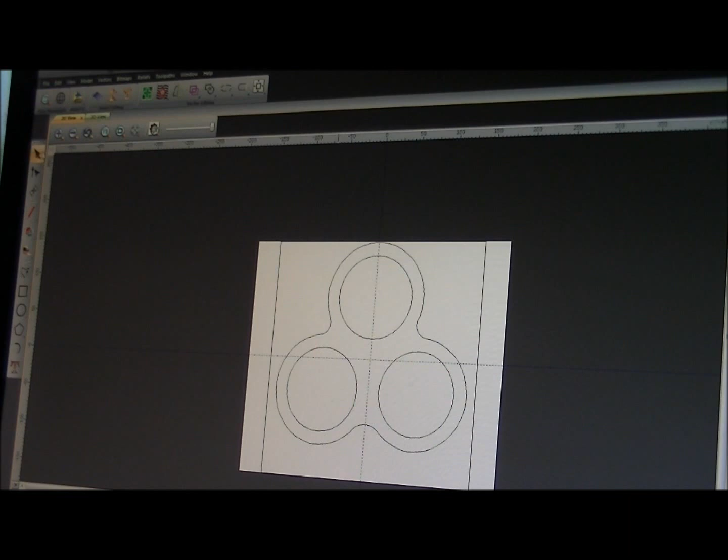Okay, so having snipped away at all the lines that we don't require, we end up with our basic shape. Now there's just one last little circle we need to put into the middle here, which is going to be our center boss, and I want that to be 19mm. Okay, so here we have our basic design. We've got to do a few special things with this now.

Select just a group like that. So what you can do is select as much as you can, and then if you press down the shift button on the keyboard and then select, you can add on selected parts. So what we're going to do now, we're going to use the arrows on the keyboard to move this design around. So what we want to do is reposition it in the middle of the material.

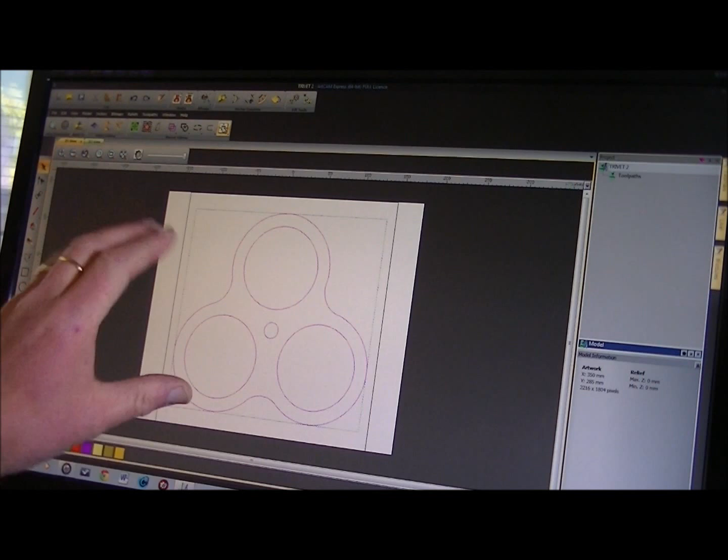There is another way we can do it, so we'll put it back. So that's just using the up and down arrows and side to side arrows. So you can move things around fairly easily. But if you go up to here and hit this button here, it will position the model or our design in the middle or dead center of the available material, which is what we want to do.

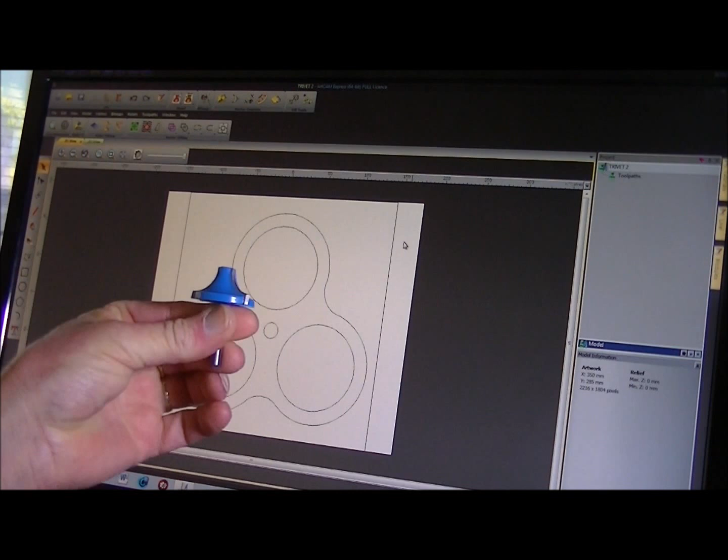So now what we need to do, we need to start the machining process, or the machining strategy. Now this is one of the tools that I converted. It's the round over tool that I converted on the lathe. What we need to do now is make an offset.

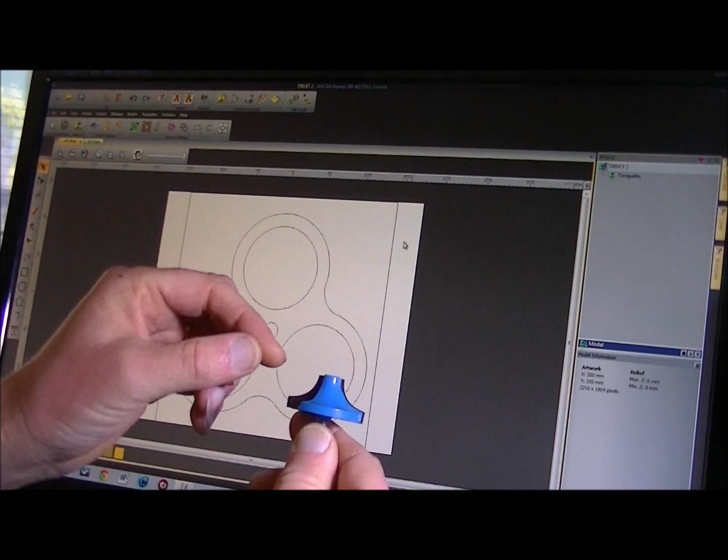In other words, if we use this tool on this piece of work in ArtCAM at the moment, it would tend to want to follow this line around, which we really want it to do, but it will follow it around with the center of the tool, which would not be very good. It'd be disastrous because it would cut into the material that far and we'd have a square edge. What we want is we want this cutting surface here to do a round over motion around this edge.

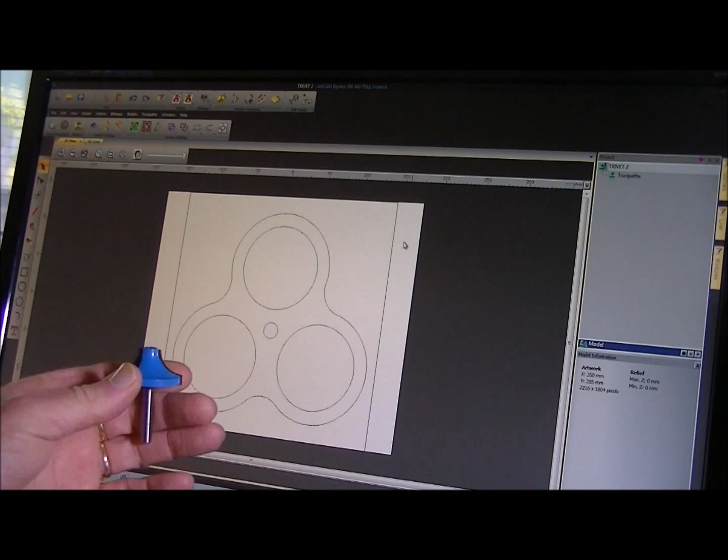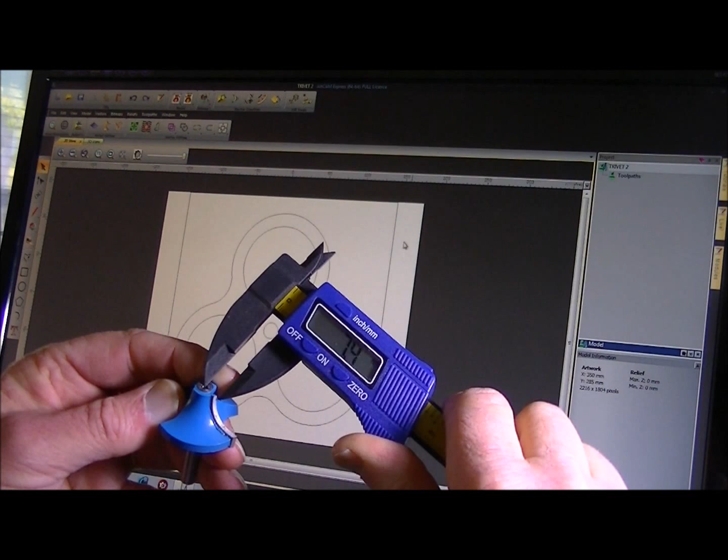So to do that, what we need to do is put into here what is known as an offset, or a tool offset, you could call it. So what we're doing here, we're going to measure from the center of this tool. I'll bring it a bit closer. Center of this tool to the cutting edge. You know, within sort of 0.5 millimeter is fine. I'm going to call that 6.5.

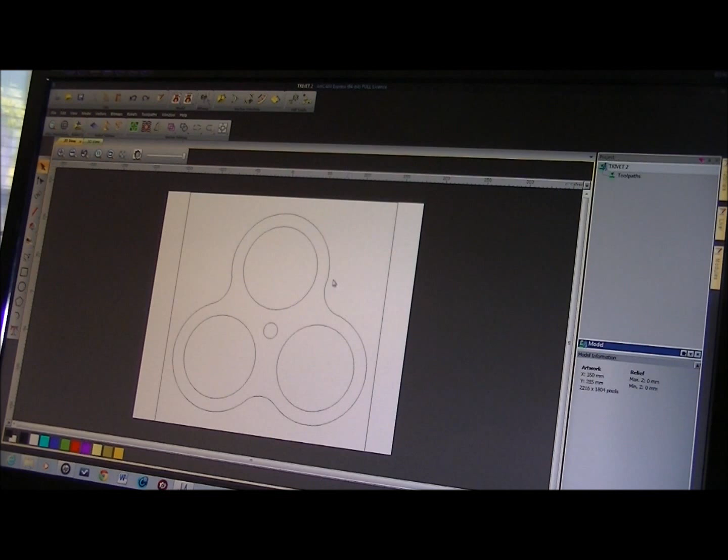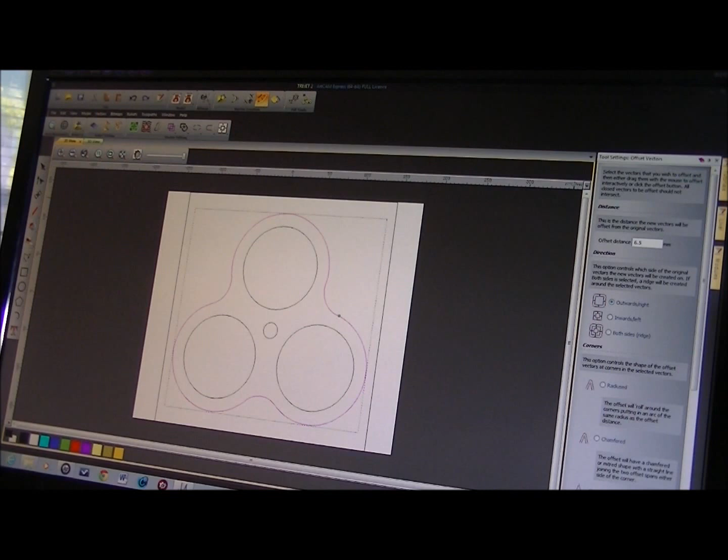So what we're going to do is we're going to select the outer vector, and we're going to duplicate a vector by the use of this tool selection here and this dialog box, and we're going to duplicate that vector, which is a line, 6.5 millimeters outwards. We want it nice and sharp, and we're going to offset, and we can close that dialog box.

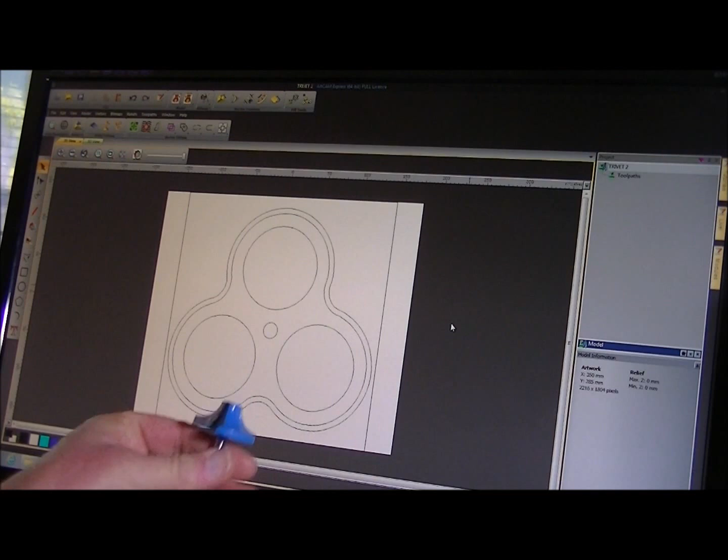So that is the line there that the center of the tool is going to follow. So that means then we'll be cutting with the full cutting surface, and we're not going to dig into the material with this square edge at the bottom.

The next thing here I'm going to show you now is how to make a pattern around the outside, or jimping, because I just don't want plain wood, although it's going to be nicely rounded over. I want to put a little bit of a pattern in it to just break it up a bit. So to do that, what I'm going to do is I'm going to come over here to the tool selection.

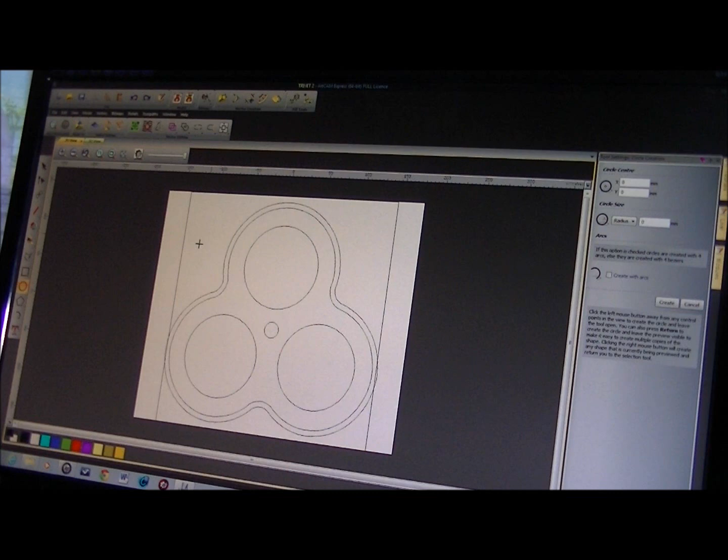In this case I want to draw a circle and click on there. And then come over here to this dialog box and say, okay, we'll have a 3mm radius circle there, so that would be 6mm in diameter, and create. And we can get out of that.

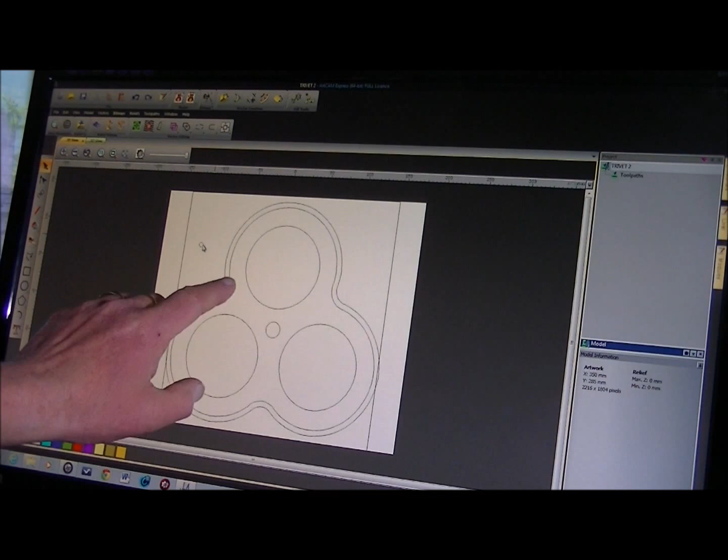Now what I'm going to do now is use a new tool, and that is I'm going to place a row of these drillings or circles around this line, and the tool to do that is up here. But first we need to select, and then select the line which you want to copy these circles around.

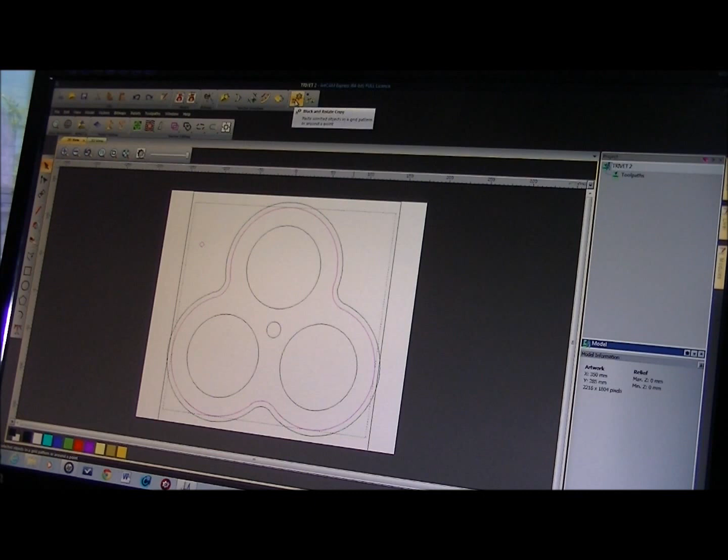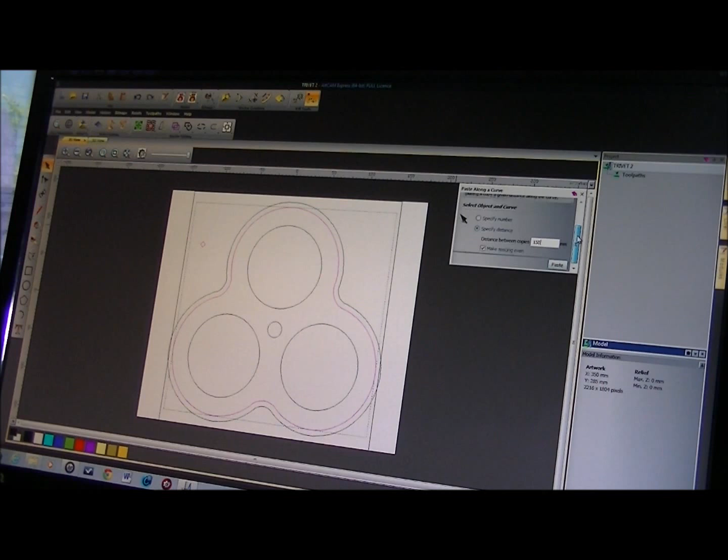And in this section here we have block copy rotate, or block copy. In other words, it'll copy it in a block, or it'll copy it in so many circles in a ring. But we want to copy along a line. That'll bring this dialog box up here, and we can specify a specific number of circles that we want to place around there, or specify a distance between them.

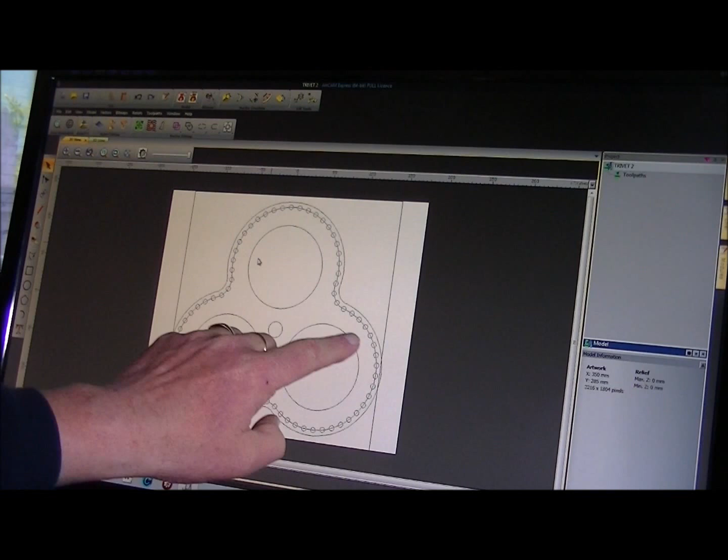So I'd say 12mm, with a 6mm hole, and paste. And there you have it. All you need to do is to select this row of circles. Now just pick one and just select it, and it selects the whole lot.

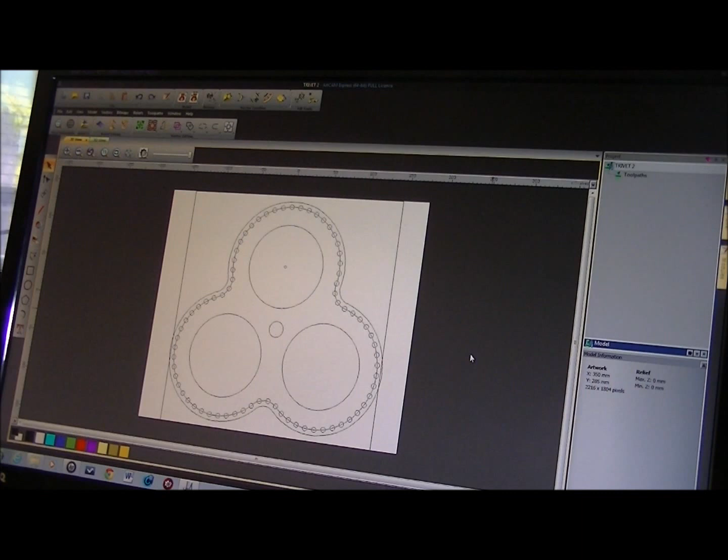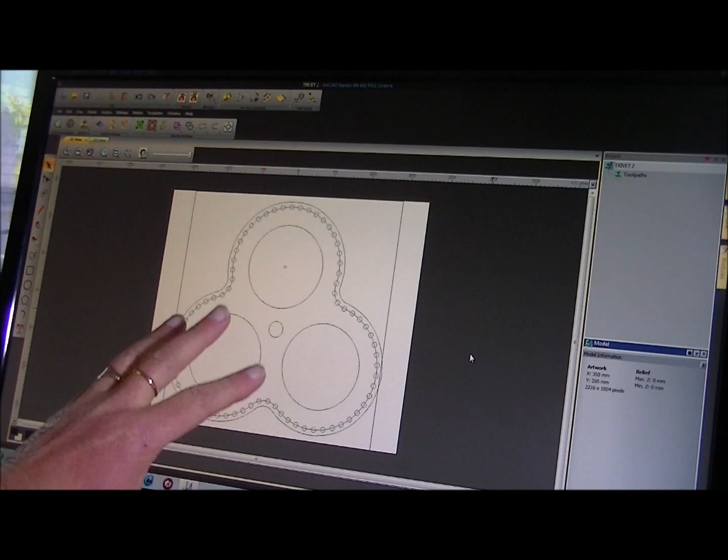And get rid of that. So what I want to do is I want to be able to put a screw in here, and a screw in here to hold the material down, so I can machine around the outside, because this material is not going to be there. Initially I am going to be clamping the whole material from out here, but to be able to machine this around here, I'm going to have to clamp it from the inside. So I'm going to do it in 3 places: center there, center here, and one in the center here with a washer on it. So we have to be selective of what we machine first.

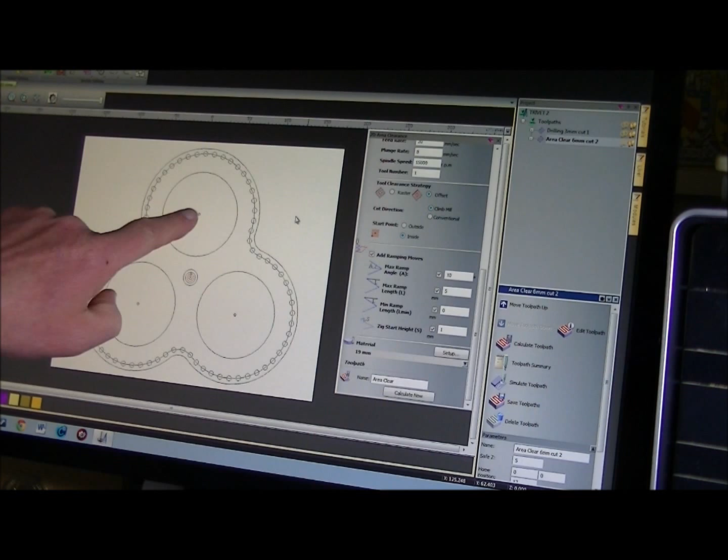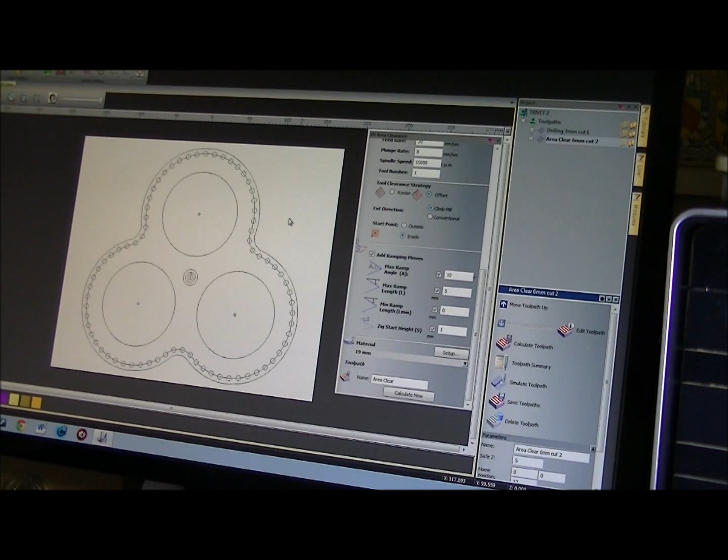So up until this point we will be having a clamp on this side and a clamp on that side, holding the material down onto the bed for us to drill these holes and machine this center part out. And at this stage then we are going to be putting a screw in here, here, here and here. So now the next operation is actually to cut this out, and we're going to cut it out on the line that we've put this row of holes in. And we're going to cut it out with the 6mm, and we're going to run the mill on the outside of the line.

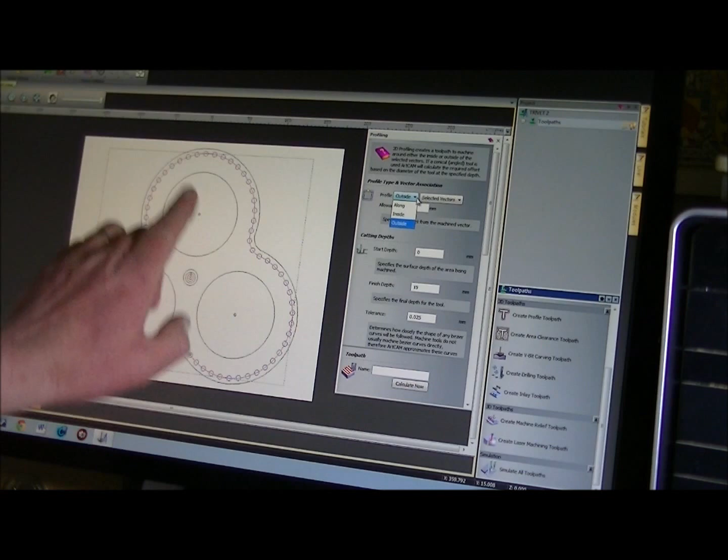So let's get out of this a minute, and what we'll do, we'll select that line, and select create a profile toolpath. And now we have the selection of machining the outside, which is the one we actually want, along this line, which means the center of the tool is going to machine along the center of the line, whatever depth we decide, or it will do the inside, which will be on the inside of the line. Follow it around. So as it is, that's correct. Now then,

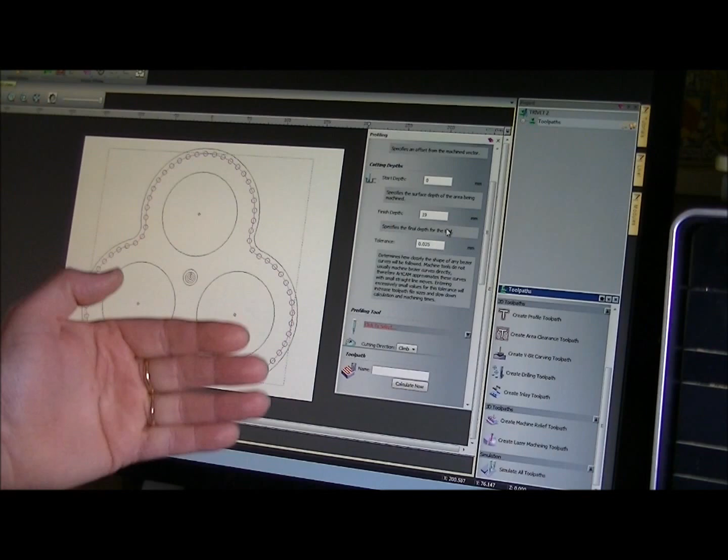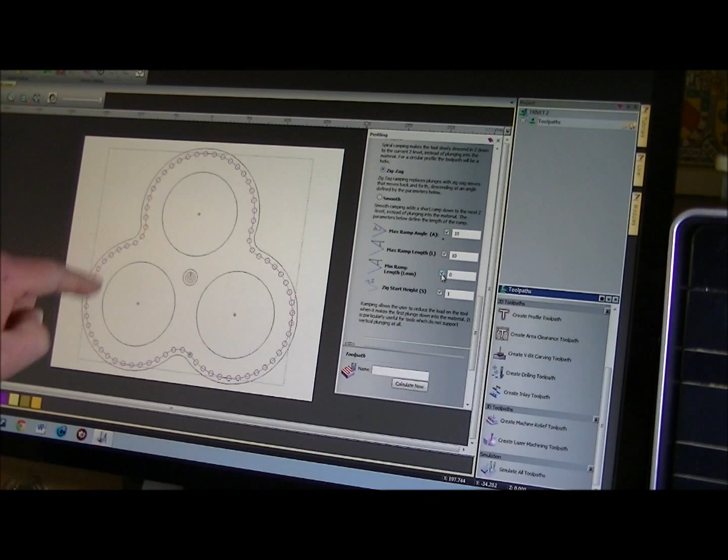I mean, it's only oak, but you know, I don't like to put the tool under any great stress, and it makes it easier to evacuate the material coming out of it. 50 there, I suppose. 45, 50. 50 might be a bit high, so I'll go 40. 40 millimeters per second, which is a pretty decent rate for a little tool. Plunge rate. We will go 15 millimeters plunge. I'll let it come through the top zigzag. In this case, we can take this back up to 10. It'll just follow the curve around like this and work its way in. That's all okay. I don't need to leave any bridges or tabs. Calculate. Done.

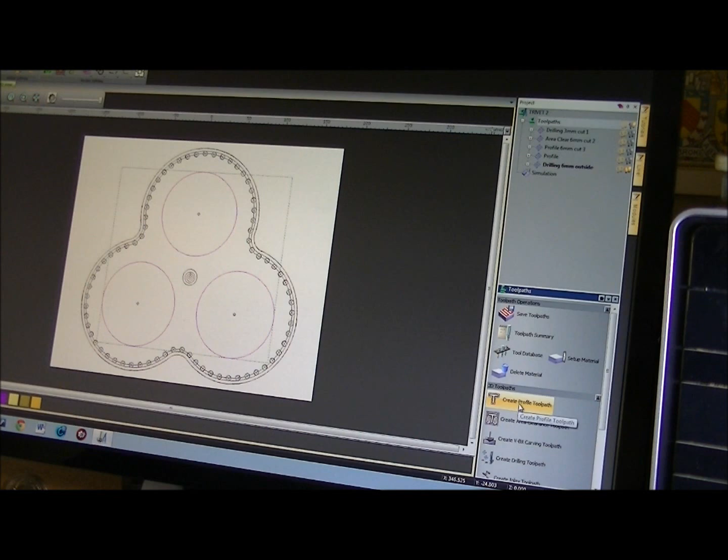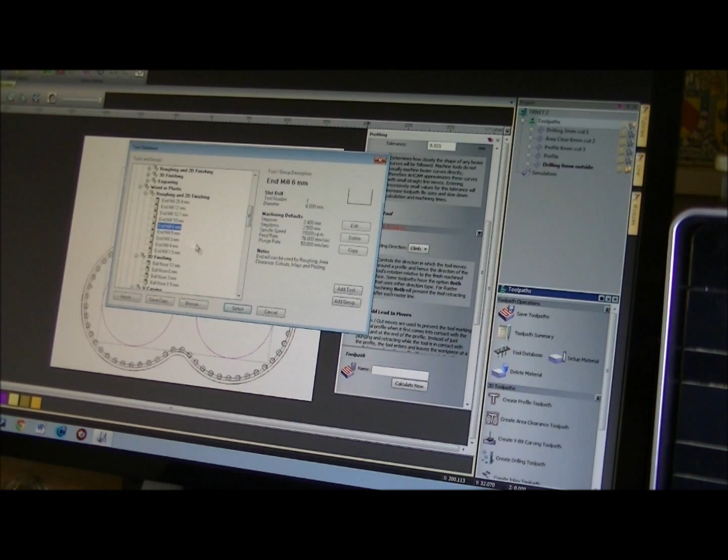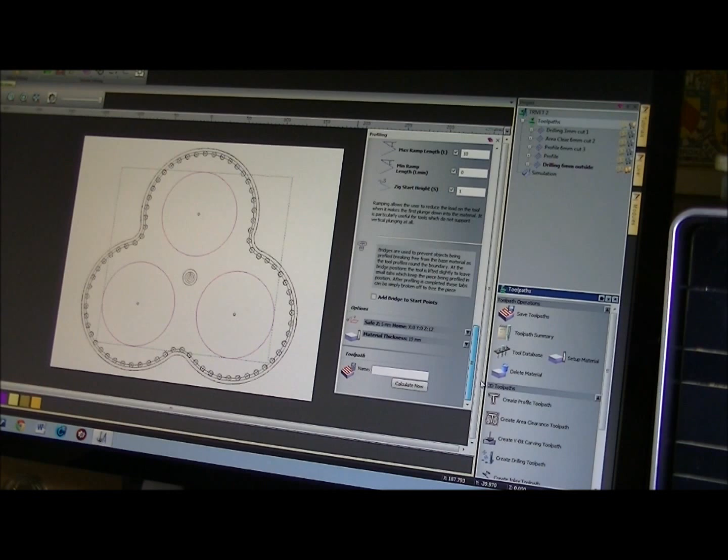And we're going to use the 6mm again for another profile cut, and this time we're going to do the profile cut on the inside of these circles. Start depth, finish depth, that's all okay. Tool select, 6mm end mill. Gets a bit boring doing this, doesn't it? Step over, that doesn't matter. Step down to probably 50 is okay. 15. Ramps. And so then we can calculate.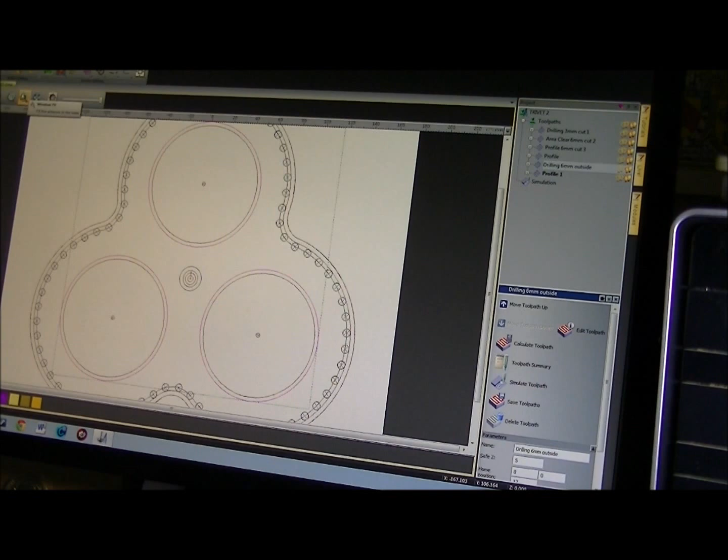Okay, so now we can see what we have. So if we go into the 3D section now, what we're going to do is we're going to simulate everything. So we'll turn these off, because at any time you can see where the tool paths are. You can turn them off, turn them on, whatever you want to do. So now we're going to simulate. Simulate all tool paths and see what we end up with.

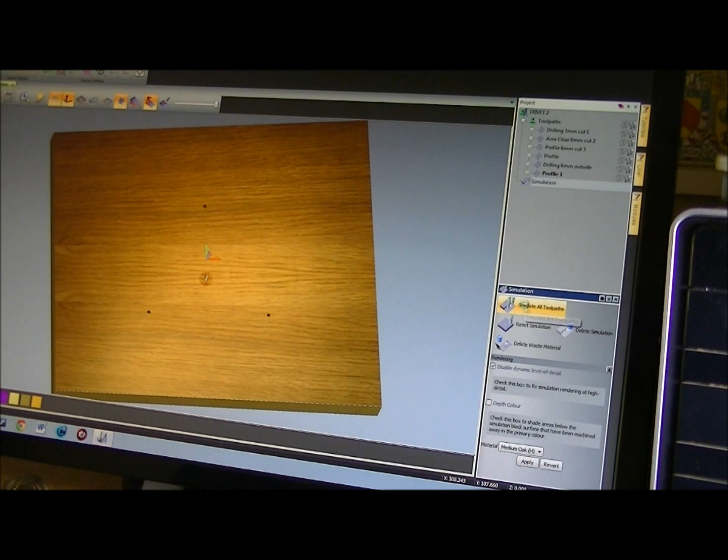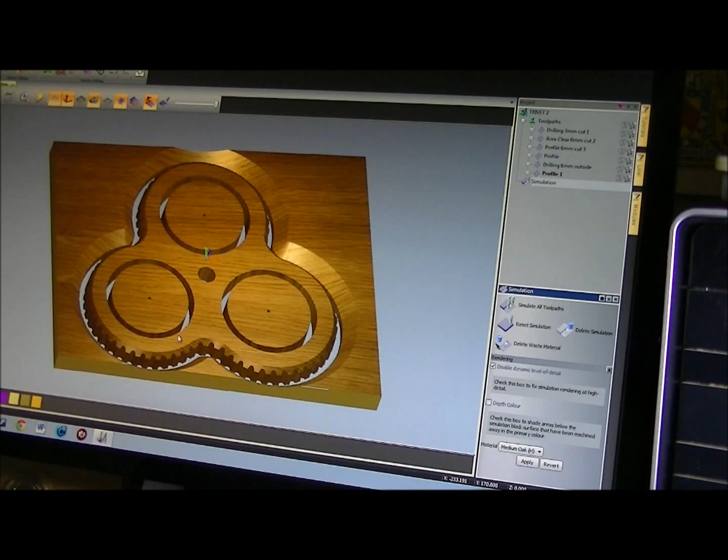That's the sort of thing we're going to end up with. I wanted to give it a toothed gear look, although it's going to be a kitchen item. Being an engineer, I like engineering themes. So there we go, and don't forget this is going to be rounded here, not square. So we'll now cut it on the CNC machine.

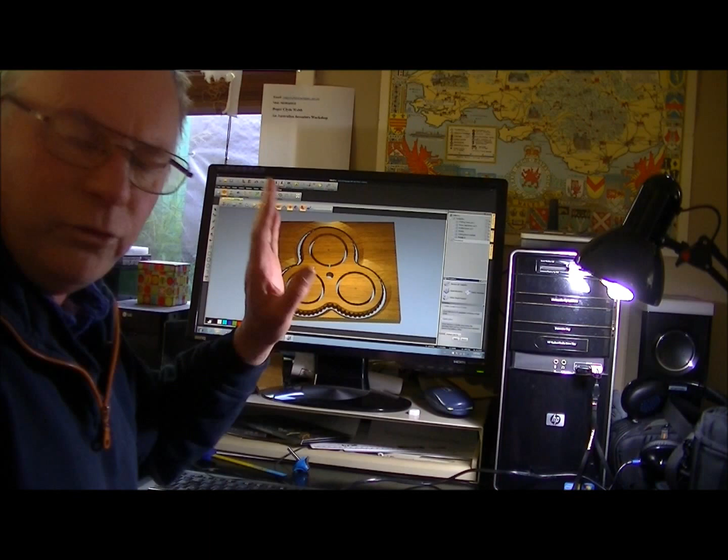I hope you've liked today's project, this part of the trivet anyway. So the next video will be machining this on the CNC machine, and I may incorporate a little bit of machining on the lathe as well to get the finished item. So I hope you've enjoyed this video as part of the group of videos that I'm doing, trying to show you the full process that you would have to go through to making an item. But bear in mind, it's time consuming to make something like this, but once you've made it and you've got the tool paths, you can set the machine up to cut many of these out per day. So you only have to do this process once in ArtCAM.